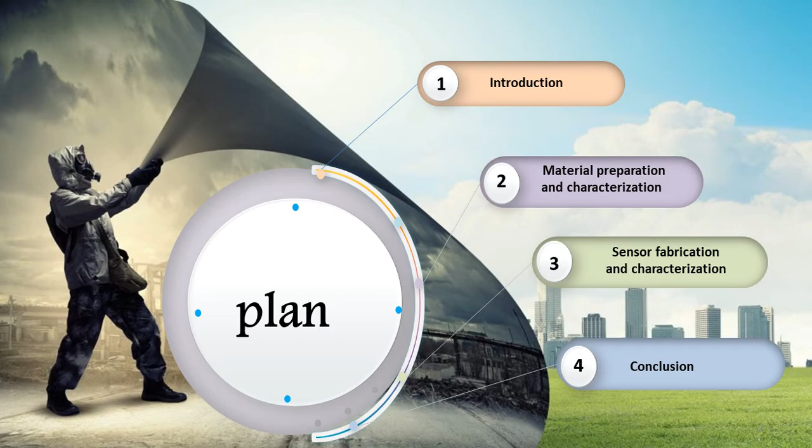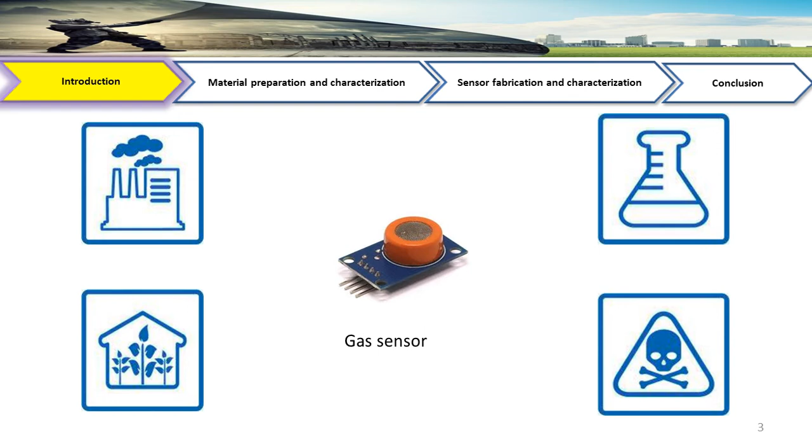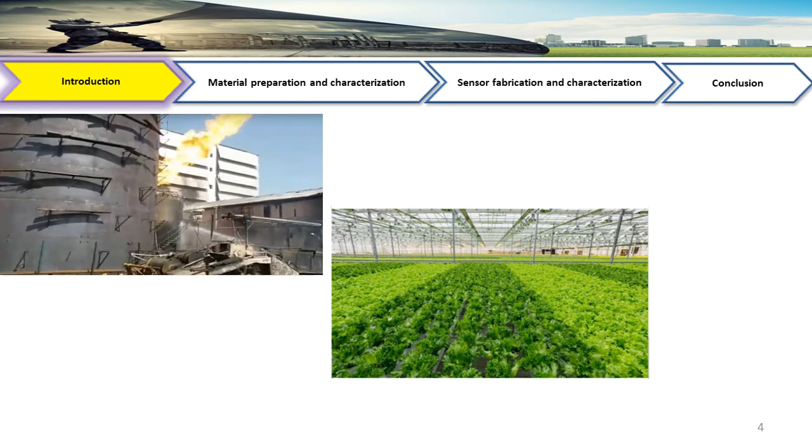Since many decades, the world's awareness about environmental problems and human safety has been increasing with technological developments. Gas sensors are therefore required for many applications. Among these fields of application, we can mention the industry sector, agriculture sector, detection of toxic gas, and the biomedical sector.

A sensor is a device that receives a stimulus and transforms it into a usable physical quantity. The response of this type of sensor is due to chemical interaction between the gas molecules and the sensitive layer of the sensor.

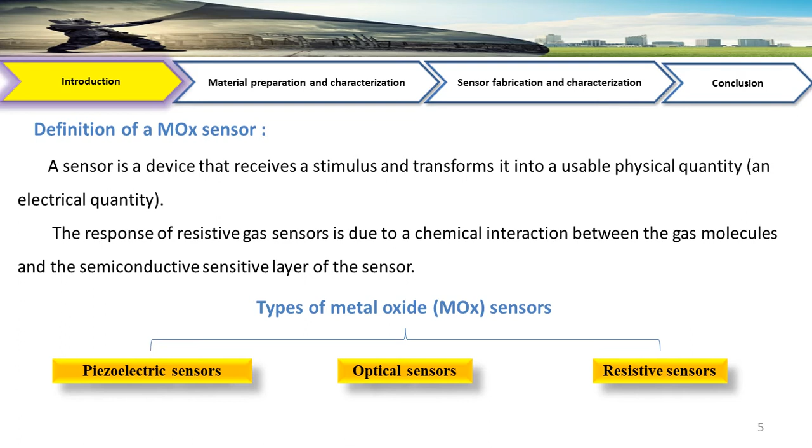Among this type of metal oxide gas sensor, we can mention piezoelectric sensors, optical sensors, and resistive sensors. This type of sensor suffers from a lack of sensitivity, selectivity, and very long response time. So the objective of this work is to realize a resistive gas sensor based on tin oxide microtubes and improve these properties by a doping effect.

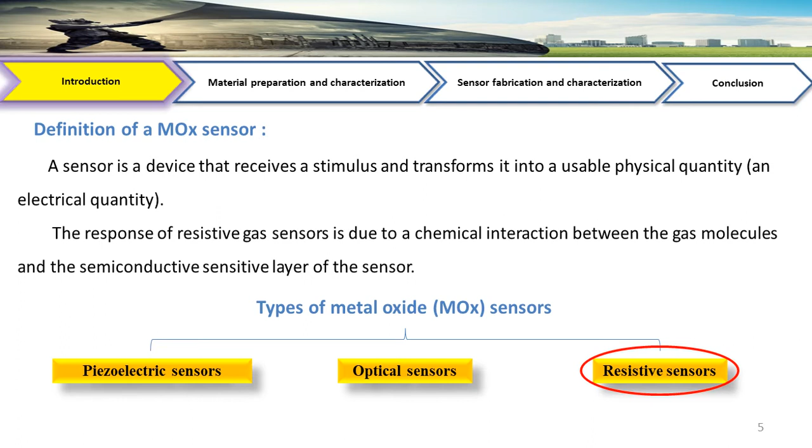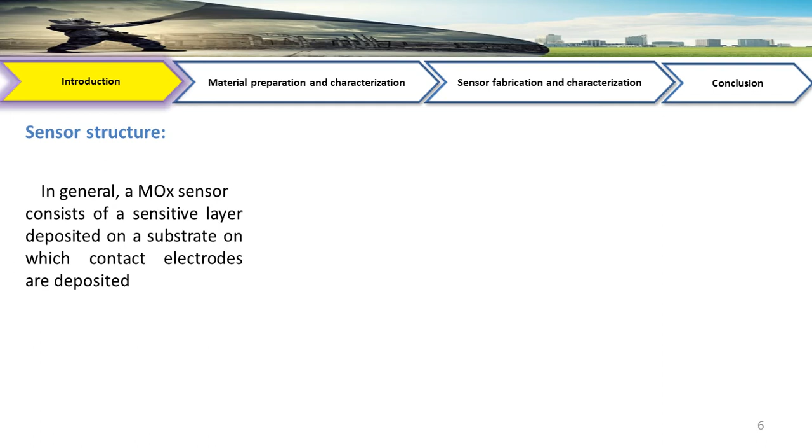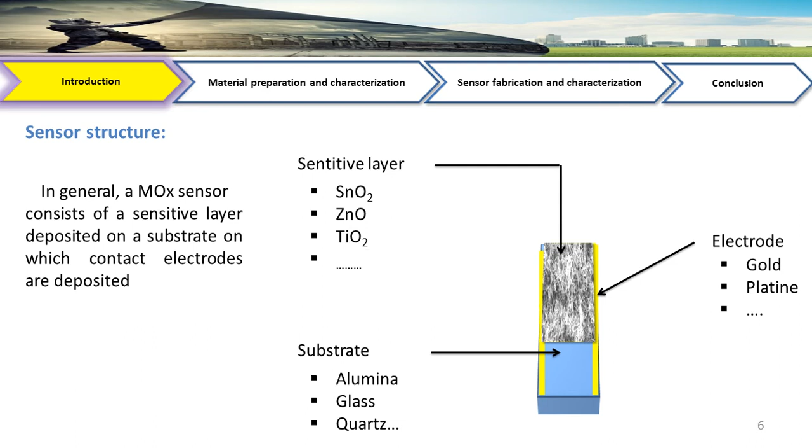In general, sensors consist of a sensitive layer deposited on a substrate on which contact electrodes are deposited, as you can see in the following figure. Regarding the metrological characteristics of sensors, we mention sensitivity, response, selectivity, response time, recovery time, and lifetime.

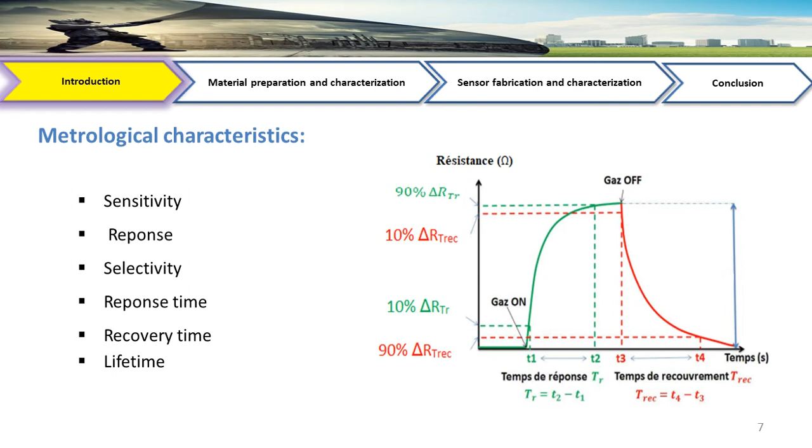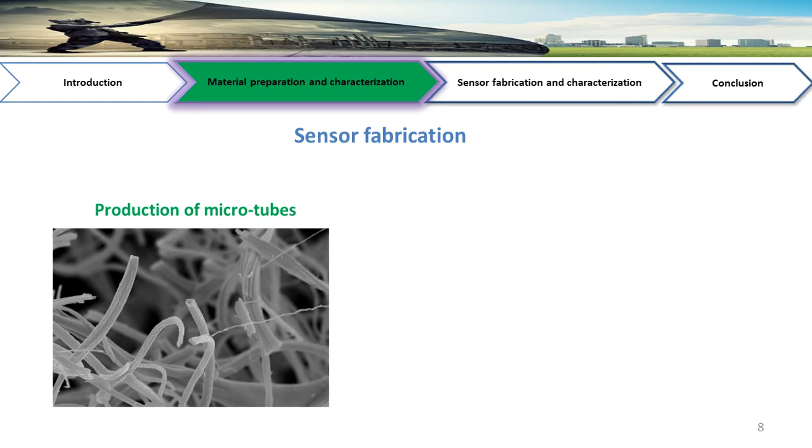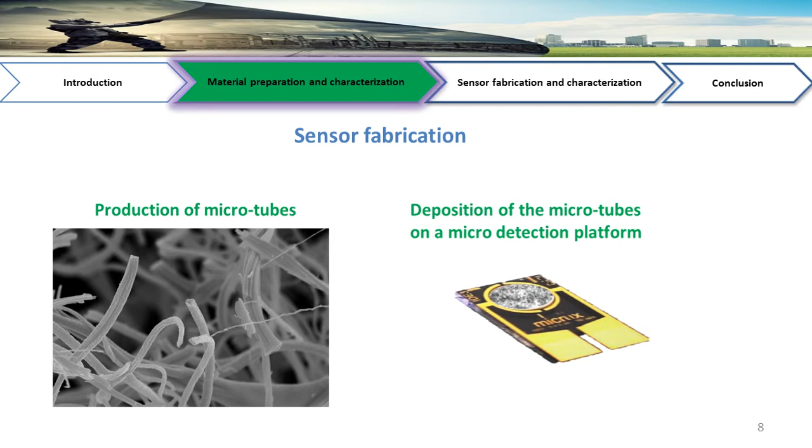The fabrication of our sensors goes through two steps: preparation of microtubes and deposition of microtubes on a micro detection platform. The tin oxide microtubes were prepared in three steps: preparation of solution, formation of tin oxide fibers, and thermal treatment.

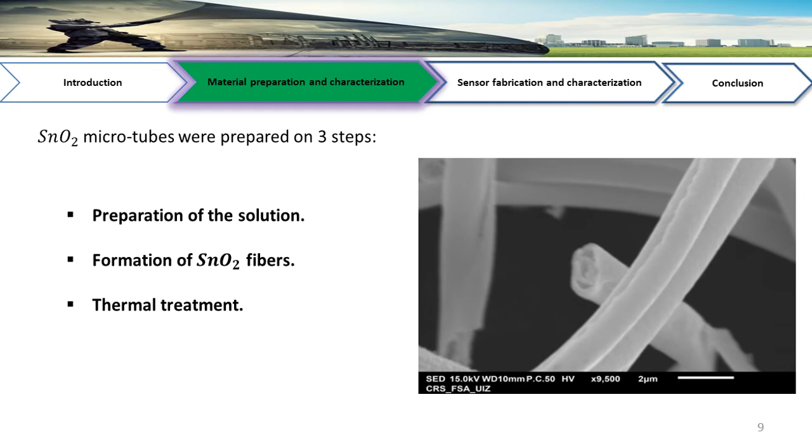The solution was prepared by dissolving tin chloride dihydrate in a mixture of DMF and ethanol under magnetic stirring for 30 minutes. Subsequently, PVP was added, followed by stirring for 3 hours at room temperature.

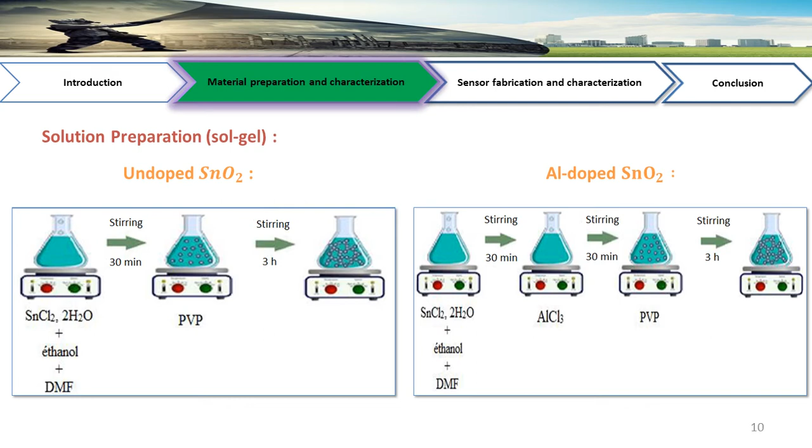A force spinning system has been designed and fabricated in the LITSIM-P laboratory for the preparation of metal oxide tubes. It is based on a stainless steel rotating reservoir with two symmetrical nozzles, surrounded by collecting metallic bars for allowing fiber collection during the jet process.

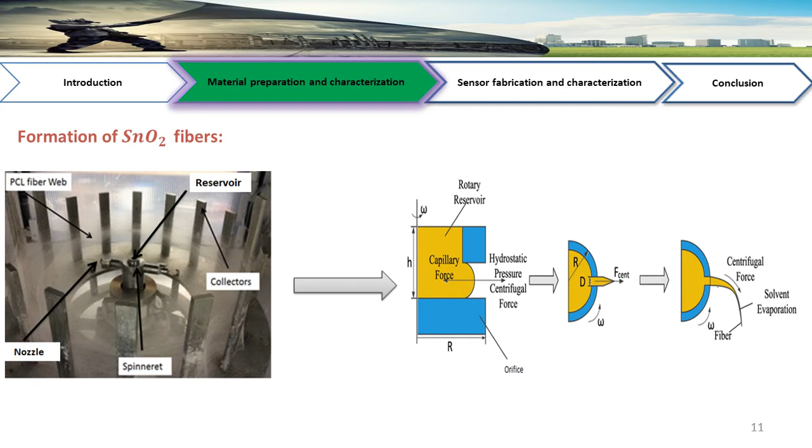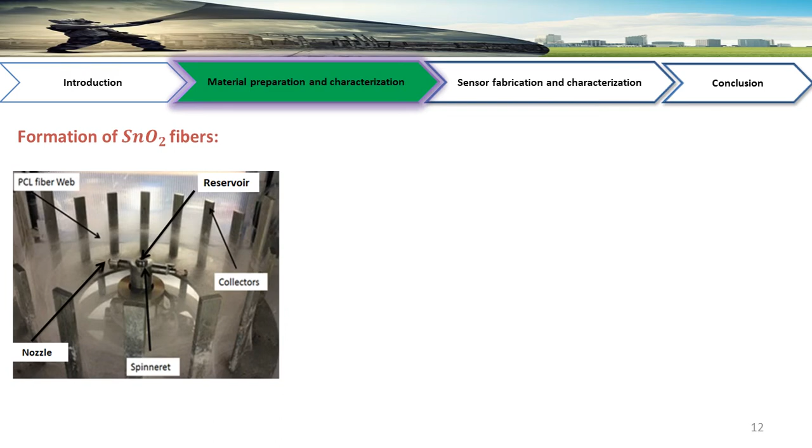The solution prepared was poured inside the spinneret and ejected onto the collector, transformed into fine fibers due to stretching induced by centrifugal force and evaporation of the solvent.

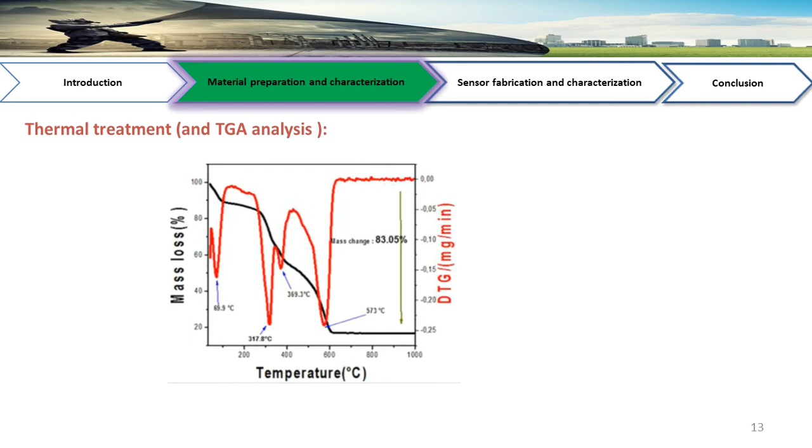In order to select the adequate annealing temperature to remove PVP and solvent, TGA analyses were performed. We can see in this graph that the temperature at which these elements are removed is 600 degrees. So the fibers were annealed at 600 degrees with a heating rate of 5 degrees per minute for 5 hours.

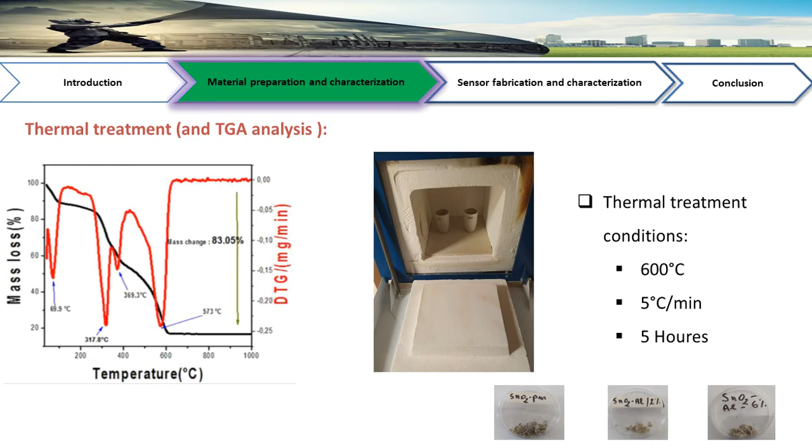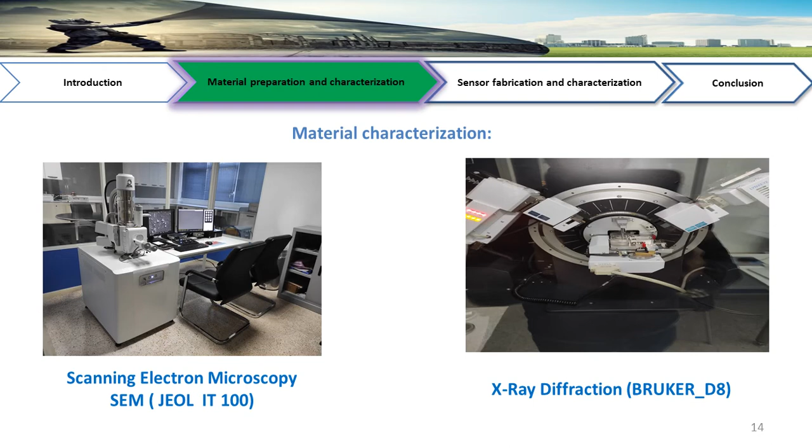The characterization techniques used are X-ray diffraction and scanning electron microscopy. X-ray diffraction analysis shows that the structure of our samples is tetragonal rutile, characteristic of tin oxide.

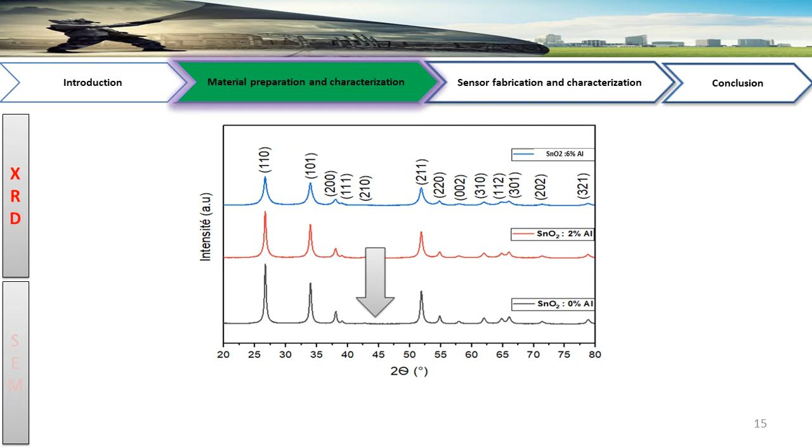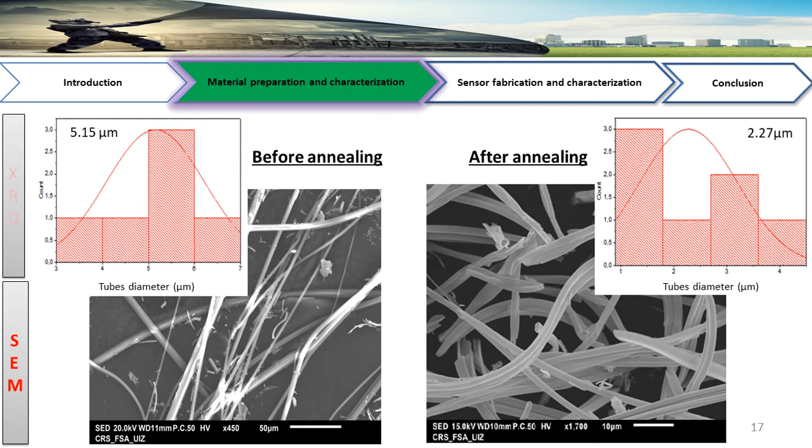You can see here that the grain size decreases with increasing aluminum concentration. Scanning electron microscope analysis shows that the samples are formed of double-walled microtubes, and it can be clearly observed that the average diameter dropped after annealing due to the removal of the PVP polymer and solvent. We can also see that the average diameter of microtubes decreases with increasing aluminum concentration.

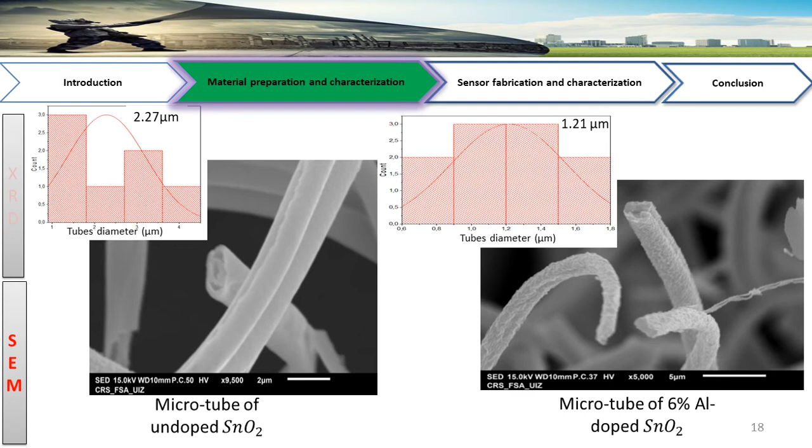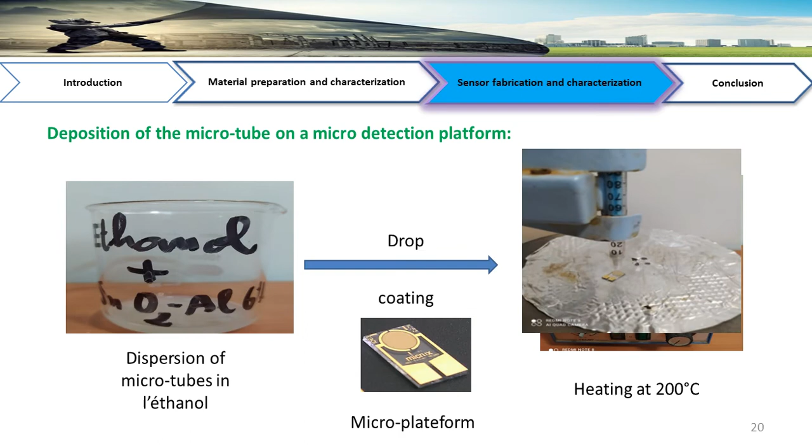To fabricate our sensors, we place the synthesized microtubes on a micro platform of detection with interdigitated gold electrodes separated by 10 micrometers.

To characterize the response of the gas sensor, the sensors are placed in a characterization circuit, which consists of a dry air generator, flow regulator, gas chamber, Arduino card, controlled by a LabVIEW interface.

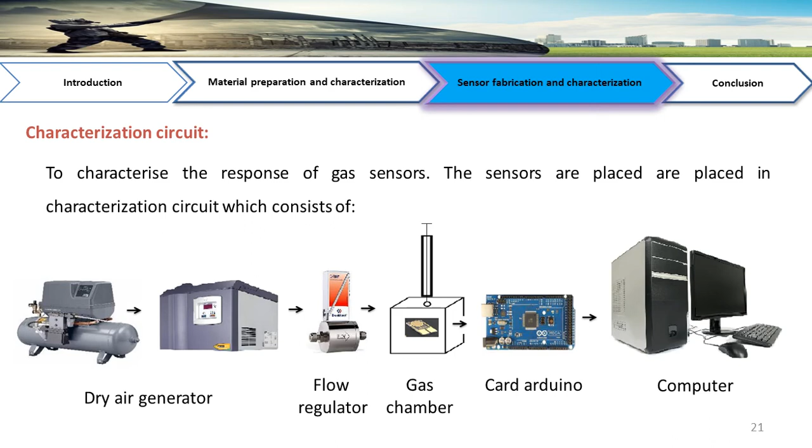Sensor response against gas was studied by measuring the resistance of the device using a voltage dividing circuit, and to activate the sensor response, the thermoactivation mode is used, as you can see in this picture.

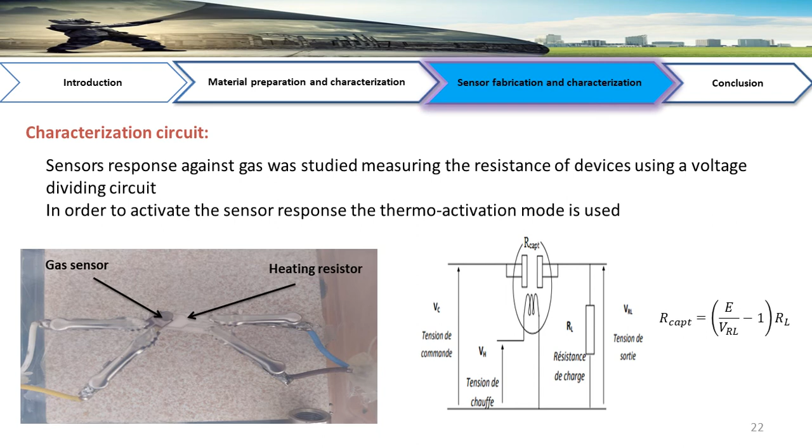The prepared sensors are based on microtubes of non-doped tin oxide and tin oxide doped with 6% aluminum. The following figure presents the characterization results of our sensors under ethanol, acetone, and benzene at 180 degrees. We observe an improvement of the response and response time by the doping effect.

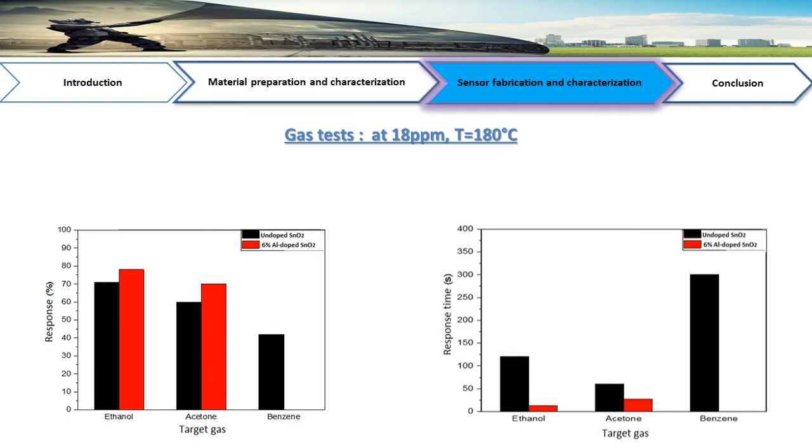The sensor based on tin oxide microtubes doped with 6% aluminum has a high sensitivity to ethanol and acetone compared to the other sensor, and also has a low sensitivity to benzene.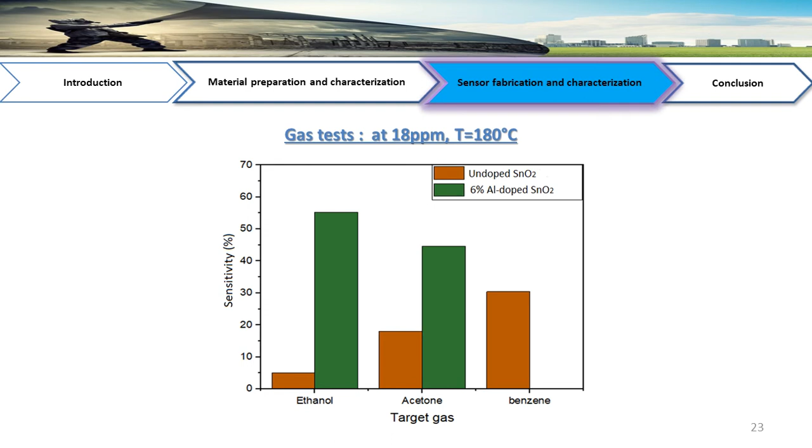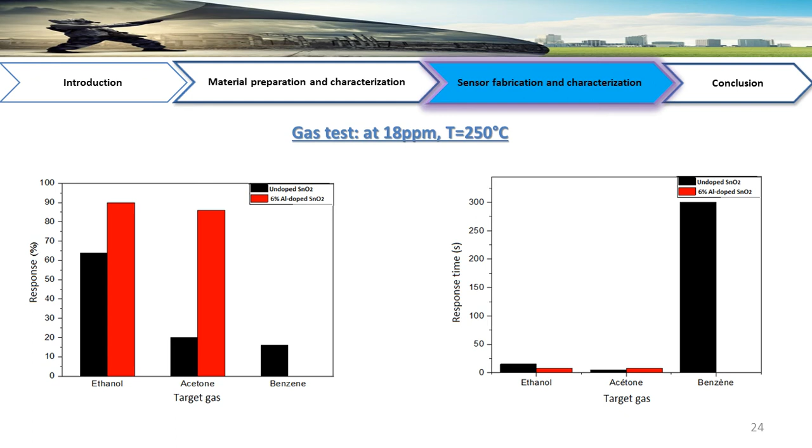To improve the characteristics, we increased the activation temperature to 250 degrees. We observe an improvement in the response and response time of our sensor due to the temperature effect.

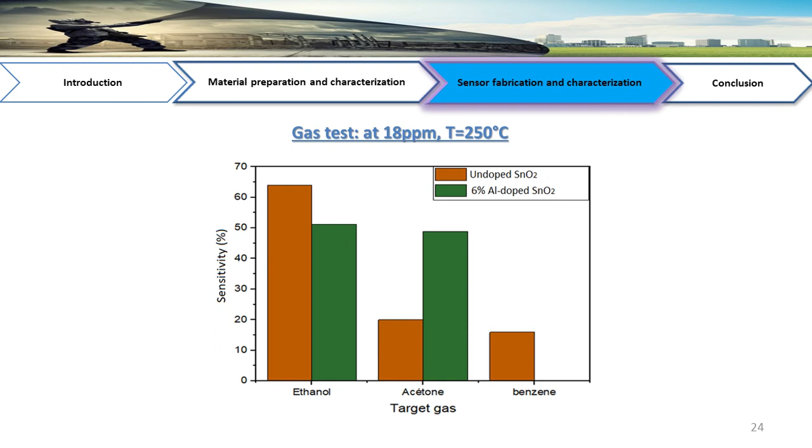The sensor based on non-doped tin oxide microtubes has a high sensitivity to ethanol compared to the doped sensor, and the doped sensor has a low sensitivity to benzene.

Another study was done to investigate the effect of flow. We increased the flow rate from 50 SCCM to 200 SCCM. We also observe an improvement in the response and response time due to the flow rate effect.

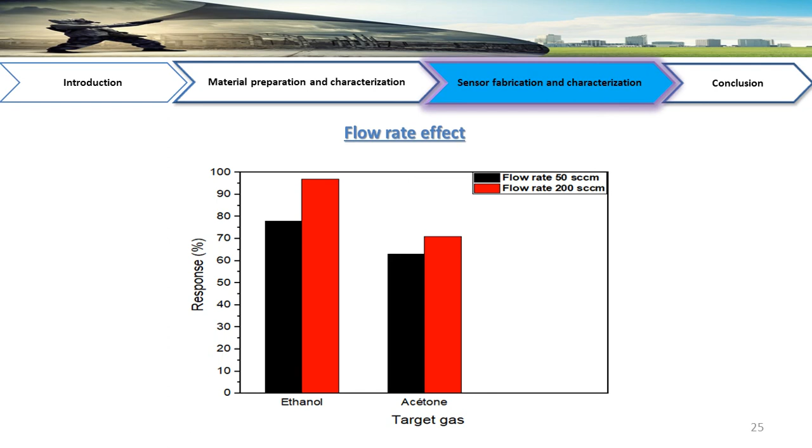Finally, in this presentation, we have given some general information on metal oxide gas sensors. Non-doped and aluminum-doped tin oxide microtubes were successfully synthesized by the force spinning technique, which is a simple and safer technique with a high production rate and faster than other techniques, as confirmed by scanning electron microscopy.

The characterization of our samples by X-ray diffraction and EDS show good structural properties and confirm the successful substitutional doping of aluminum in the tin oxide lattice.

The sensor characteristics of non-doped tin oxide and aluminum-doped tin oxide highlighted the effect of doping on the improvement of sensor sensitivity, response speed, and partial selectivity. The optimal working conditions of the sensor, such as activation temperature and flow rate, were respectively set to 250 degrees and 200 SCCM.